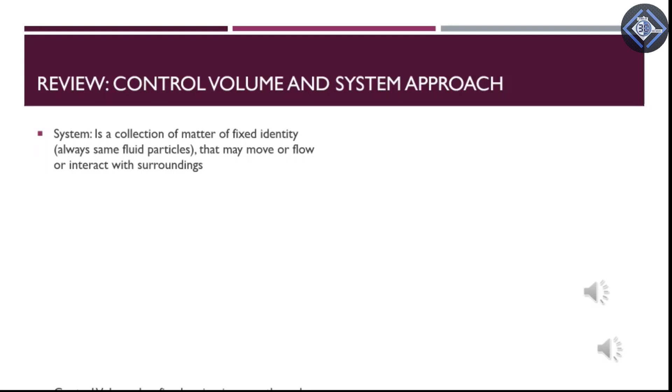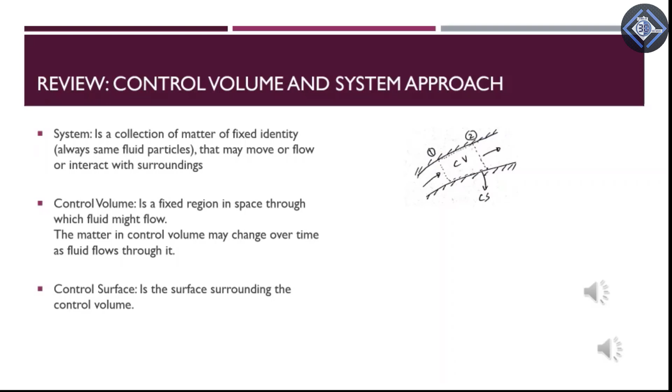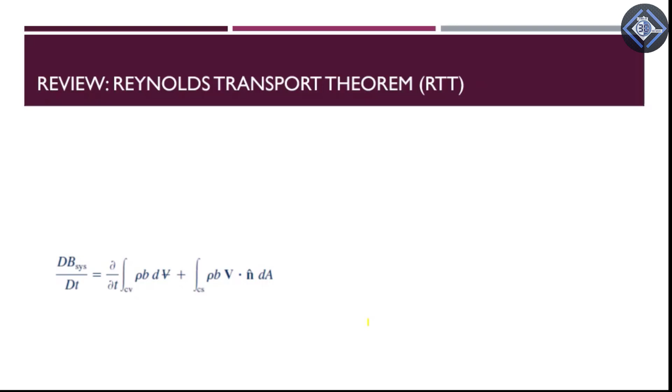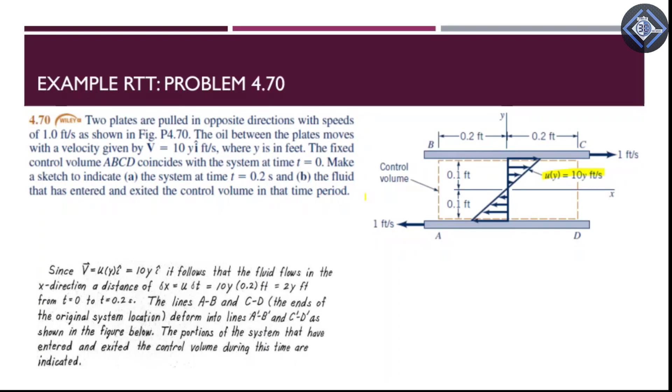So to start with, we know that velocity is a function of y, and we have only an x component. You can also see this velocity profile over here in this figure. So at the plates, oil will have a velocity of 1 feet per second. At the upper plate it will have a velocity of 1 feet per second to the right. At the lower plate it will have a velocity of 1 feet per second to the left, and at y = 0 the velocity will be 0.

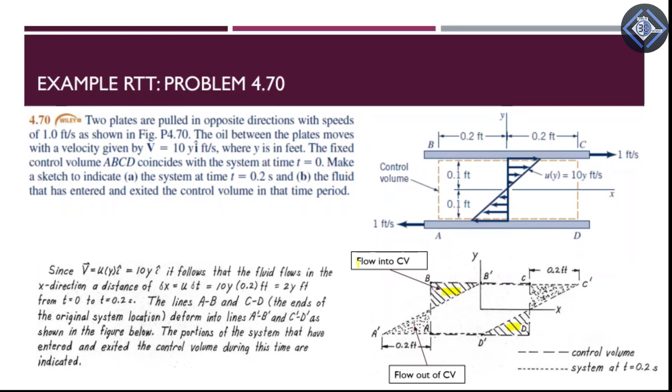So now we will see how we can derive the conservation of mass via the Reynolds transport theorem. So we assume B to be the mass of the system. As B is the extensive property of the system, we'll have a corresponding intensive property, which will be capital B divided by mass of the system. This will give us small b, which is the intensive property of the system.

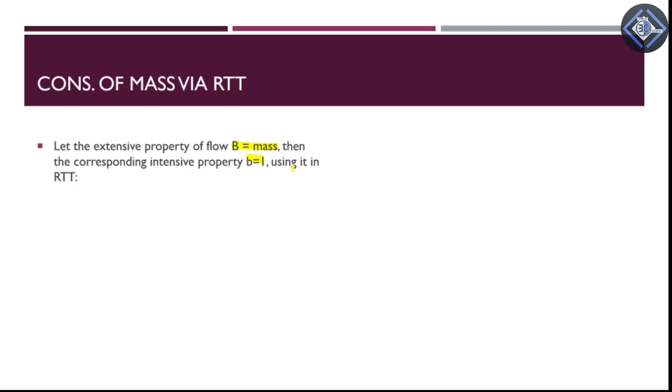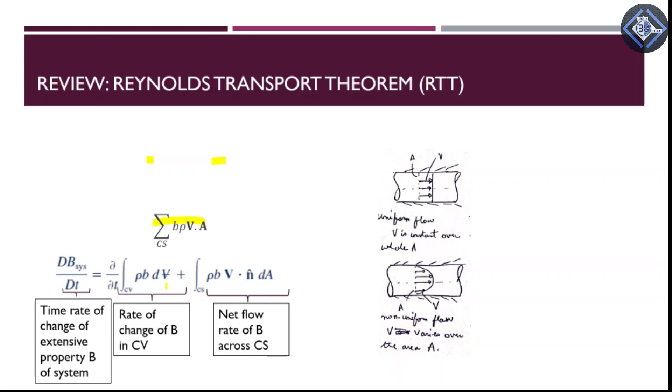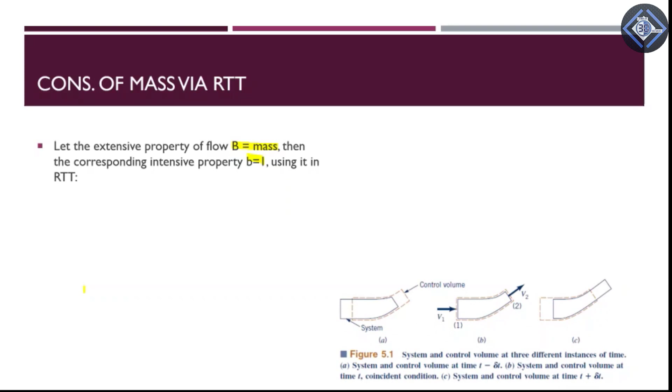b is equal to 1. So we will use capital B equal to mass and small b equal to 1 in our Reynolds transport theorem, which we have just reviewed earlier in this lecture as well. Here is the equation. So instead of this b, we'll have 1 over here, and this will be dm over dt. So here is our Reynolds transport theorem with B equal to mass and lowercase b equal to 1.

Now the terms appear, which actually define what these terms are. So the first term, dm_sys over dt, is the time rate of change of the mass of the coincident system. If you see figure B over here, at this point the control volume and the system are coincident, and this term gives the rate of change of mass inside the system.

The second term is the time rate of change of the mass of the contents of the coincident control volume, and the last term is the net flow of mass through the control surface. So what is flowing in and what is flowing out, the sum of these quantities; if the net flux is out, it is taken as positive. If the net flux is in, it is taken as negative.

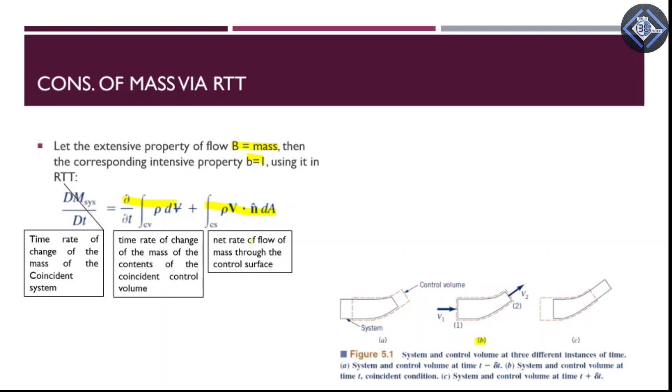So we know that a system by definition is a collection of matter of fixed identity. So the particles that define the system will never change. This means that the mass of the system will never change over time. That's why dm_sys over dt will be 0.

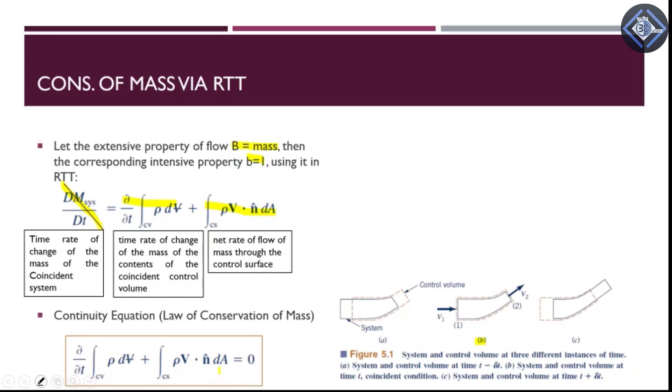So with this information, the continuity equation, or the law of conservation of mass, as it is most commonly known, for a control volume can be written as ∂/∂t of the integral over the control volume of rho dV plus the integral over the control surface of rho V dot n hat dA, where n hat is the unit normal on the control surface, and the unit normal n hat points outward of the control surface.

So this summation can be written as the summation of rho VA out minus rho VA in, and this will be 0 if we are assuming steady state. This means that ∂/∂t of rho dV, the rate of change of mass inside the control volume, will be 0 in a steady state problem. So m dot out minus m dot in will be 0, or m dot out equals m dot in. So in a steady flow, what flows in will always equal what flows out.

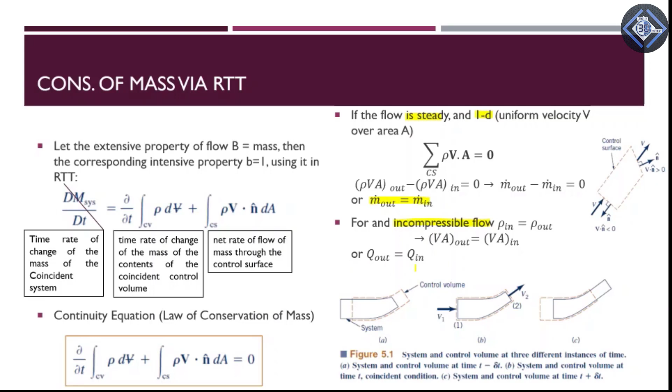Additionally, if the flow is steady and one dimensional, and also incompressible, then the law of conservation of mass, m dot out equals m dot in, can be written as VA out equals VA in, which means the volumetric flow rate at the outlet will equal the volumetric flow rate at the inlet. So for an incompressible flow, we can simply say that the volumetric flow at the outlet and at the inlet are the same.